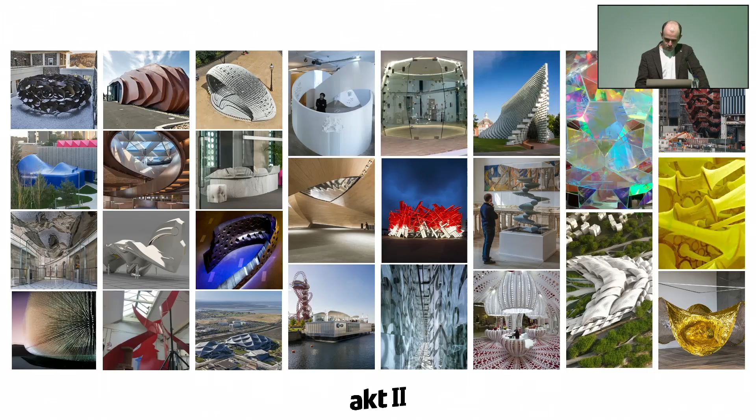I guess there's an invisible thread that connects emergency to technology, and incidentally it's a thread that connected the majority of the projects that I had the fortune to be involved in delivering for the past 18 years that I've been working in practice. I particularly enjoyed reviewing the students' work this morning, and I'm sure that if you were there, you'll be able to recognize some or many of the challenges encountered during the course in the projects I will be showing you tonight. Where do we start? I just wanted to talk a little bit about engineering for a change.

Engineers, we're trained to solve problems, and so we do like solving them, but the harder the problem becomes, the more satisfying it is for us to solve. And incidentally, this is not a good thing sometimes. And this is not me saying it, it's actually Bill Baker from SOM. We asked him to write some notes for one of our books. He was the principal engineer for the Burj Khalifa. And I thought his approach was quite interesting, almost like a therapeutic self-understanding of his own practice, our practice.

The postulate, this affirmation, is that just because we can engineer a solution, it doesn't mean that we must do it. And straight away you can perceive the gravitas, the responsibility that directly or indirectly is given to us when a project is starting. I think Bill's intuition needs some expanding. Our work is about balancing the many different forces that are driving projects and their interrelationships, which is what you guys are also looking into in the course.

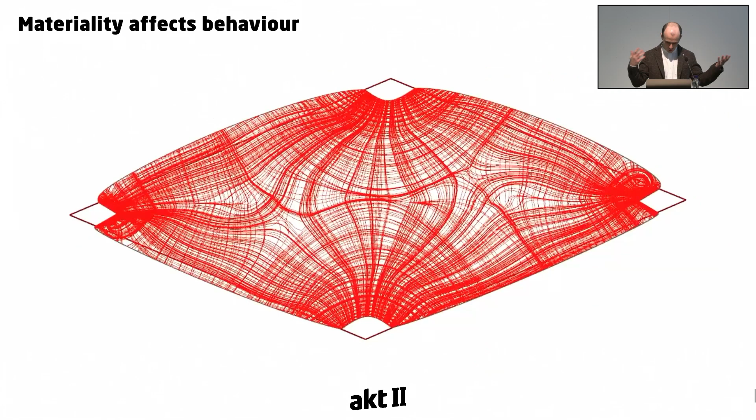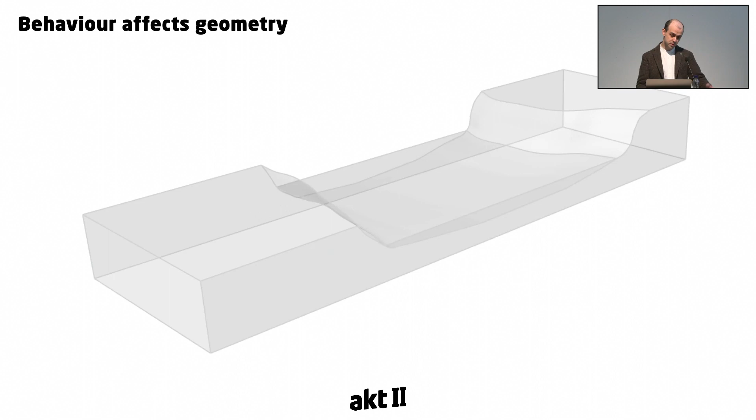So often materiality affects behavior. When we're trying to master that with the tools that we've got, we find interesting relationships, but conversely, behavior also affects materiality, so it's not a linear relationship. And whilst it affects materiality, it also affects geometry. So then the system starts to be more and more complex. And mastering that, especially in the early stages, can make or break a project.

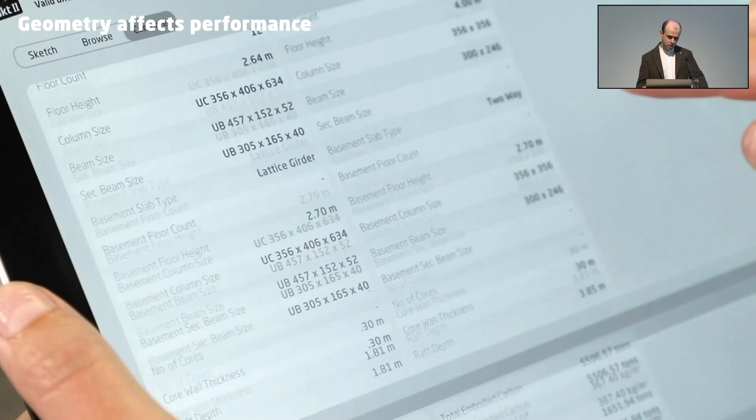But also, as we saw today, performance affects comfort as well, and this is an area where we're particularly interested. I don't know why it's skipping through, but the intangible impact of the external environment has a very big effect on what we are designing, and also on how the buildings that we make develop and expand into their design life. So our focus is always on the small, almost impossible target of integration of the various challenges we confront when we deliver a project, that very, very tiny bit in the middle.

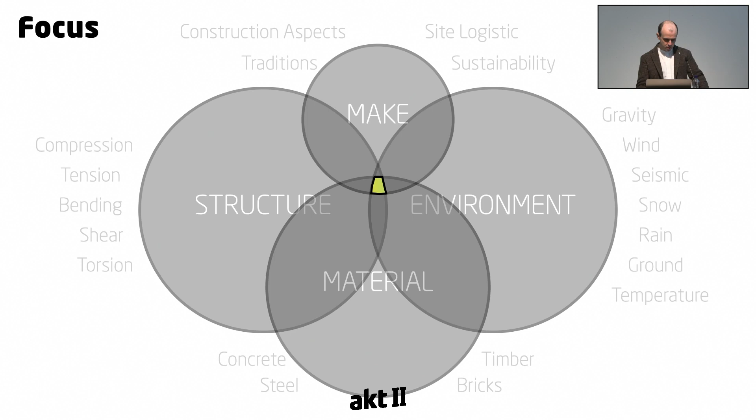But how do we get there? In our team, we have a very strict applied design and research approach. And for us, a lot of things start with process. One way of seeing it is going through the process of understanding and analysis, so going into the past, working through the historical data of a particular project, and then formulating the hypotheses and the solutions. But also the other process, the synthesis, the creation process.

So looking at the future and what that particular project will have to comply with in the future, and also predict some solutions there. But in the process of analysis, we look at traditions. So often there's a perception that some solutions are more appropriate than others. But in every project, we must look at and carefully balance the conventional solutions with the non-conventional ones. That's where research comes through.

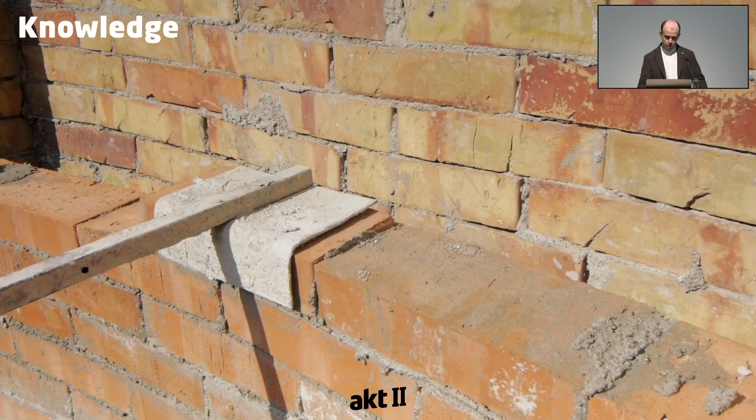And this is an important step to define the optimum outcome, whether it's when we look at the structural system or materiality, for example. And knowledge of a particular system is essential in highlighting methods of constructability, tolerances to work with, the expected movements, and also the environmental performance as a reference.

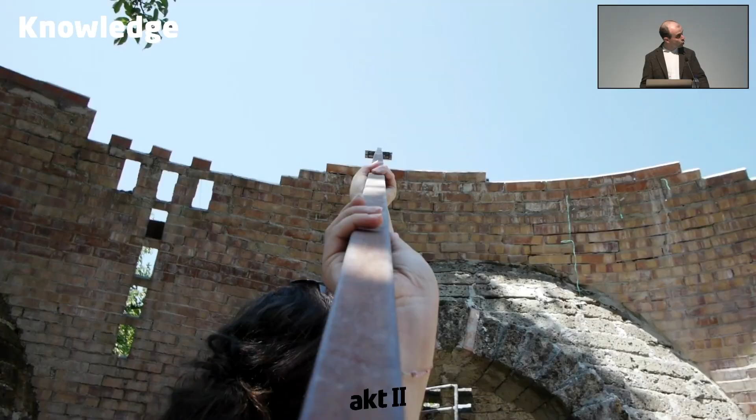So I think for us, when we start a project, it's always about looking at these parameters, but also looking at availability of a particular material or of a particular knowledge in the proximity of the site, because that drives sustainability and performance, but also drives cost. Location, of course, plays a big role in driving some of the choices. So this is a step that really needs to be taken into account from the very beginning, as this will impact our choices and how our interventions interface with the surroundings, but also how the installation methods are constrained, for example.

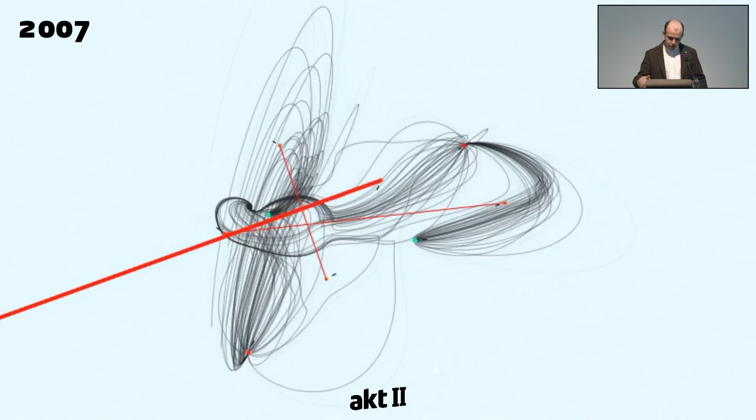And when I joined AKTII in 2007, our team was already at the forefront of digital design. Already back then, we were experimenting with in-house developed tools that play with generative design. This was a bridge over Farringdon Road, where we were playing with occupancy and usability of the crossing, defining the geometry of the structure itself. We progressed that exercise and kept refining our weapons in that sense.

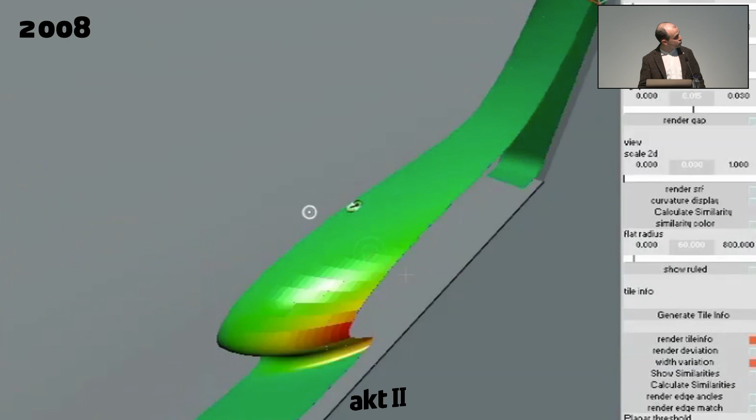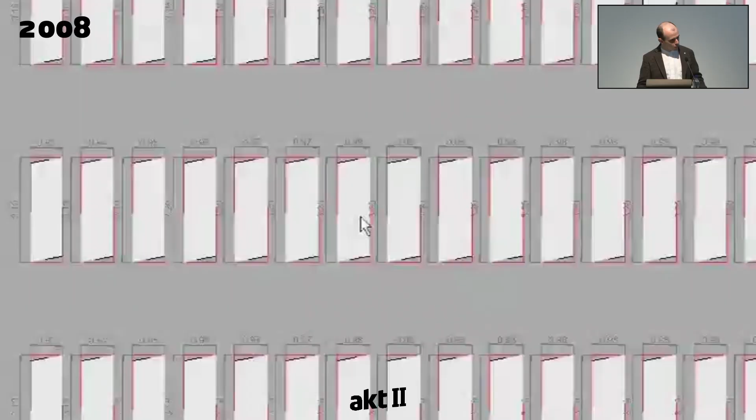This was again a software we did for delivering Zaha Hadid's Heydar Aliyev project, trying to rationalize the surface into the least amount of families of panels according to the fabricators' molding capabilities back then, which weren't as good as they are right now. And again, if you look at it with the eyes of today, this is sort of straightforward, but back then it was really trying to push the boundaries of how to control the process and how to manipulate geometry and structure to make something that is efficient.

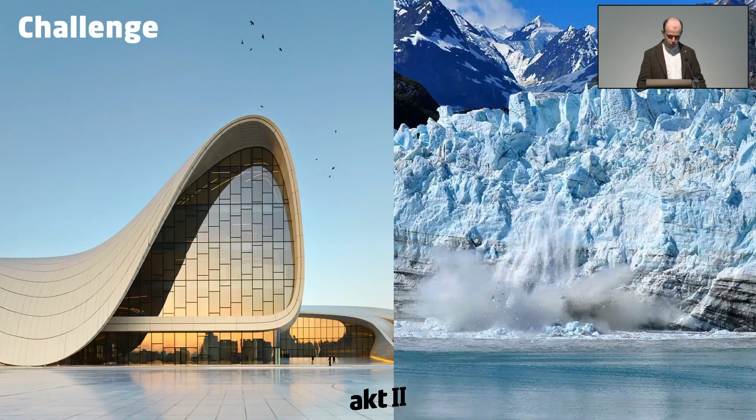And again, looking at the external environment and external boundaries for us has always been fundamental to understand what would be happening for our buildings, and how we could use that information, visualize it, and use it to design better buildings. But obviously now it's different, because the power of computation and possibility has exponentially increased, and it will do in the next 2 or 3 years or 2 or 3 months. So from one end, you've got total freedom and total speed of making things, but you're also starting to lose control. And I perceive that the challenge is not aesthetic or geometric any more, but is focused on consumption reduction. So I think that finally computation can come in handy.

So in putting together some examples tonight, I split the presentation in 4 parts, and I wanted to start with the methodology. And a project that was quite fundamental for us was back in 2016, where we had the opportunity of testing tolerance at very, very high risk, at hyper speed, and against all odds. And this was the Serpentine Pavilion with Bjarke Ingels in 2016.

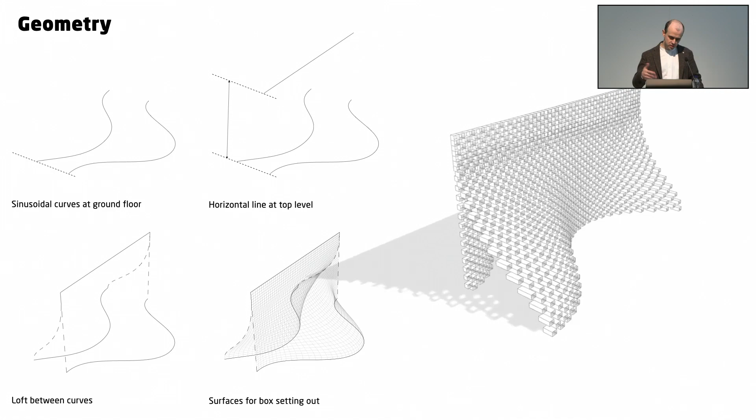Why high risk? High risk because the Serpentine is obviously, as you know, quite constrained. And Bjarke Ingels wanted to use a material that had never been used at this scale. The materialization of the pavilion was this idea of how a wall can become a pavilion if you unzip it. But when you have a new material, a new constraint and only 8 weeks of program, things can become quite tricky and almost impossible. So without a non-linear process that digitally connected the material to the geometry, to the performance, this project wouldn't have really happened. And at the time, the constraints of the competition were really, really tight.

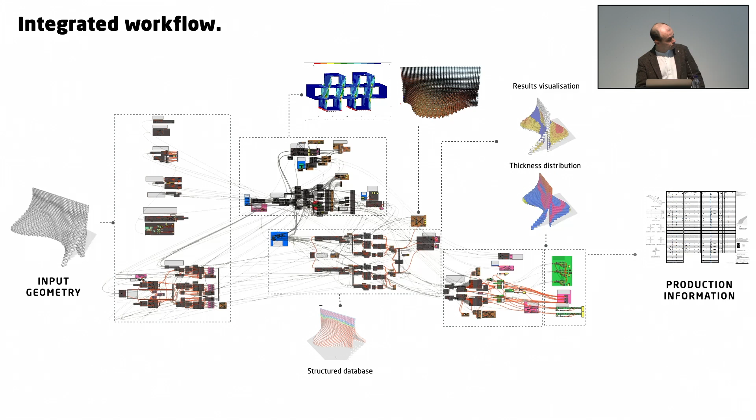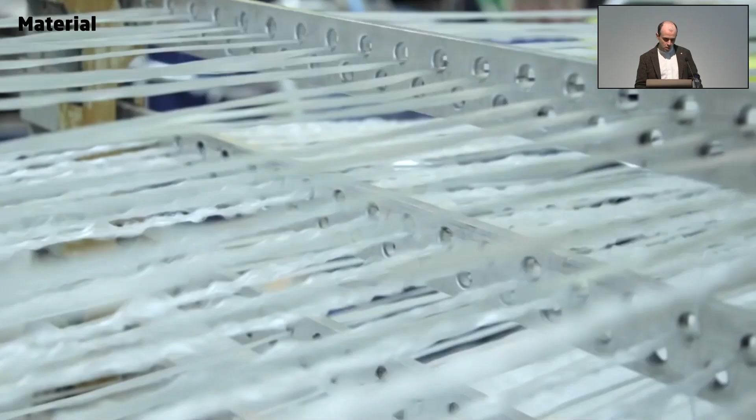The pavilion was made out of flat sheets of pultruded GFRP, which is a glass reinforced polymer, put together, glued together with the same material and interconnected by an aluminum connector. So the idea here was to control the materiality and the performance through the different distribution of the fibers in the different slices of the material. That gave us a first opportunity of controlling structure.

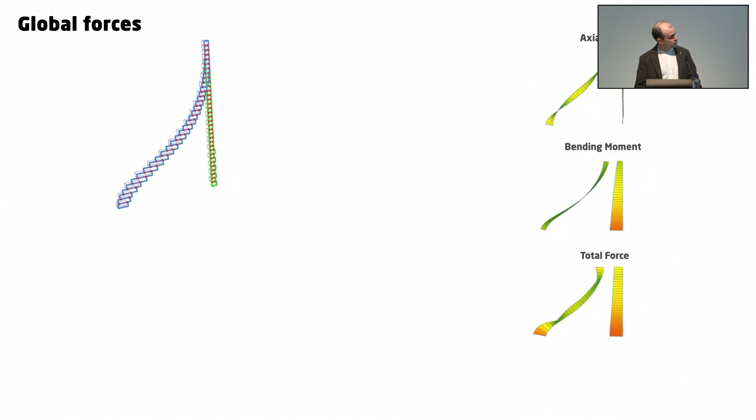And as I said, the material was bespoke as well for its properties of transparency, of translucency, actually. It was very, very important for the architects to create this evanescent result at the end. So the fibers were very carefully placed around the different elements, which meant that we needed to respond quite quickly to the different iterations, both in the macro scale, understanding how this wall performed against the external forces, but also how to quickly communicate back to the team where the critical points were in terms of connections.

So our methodology was to distribute on one end geometry and in the hidden layer understanding all those performance issues, but on the other end the output was the production element, so we could iterate quite quickly. And in doing that, we also started to highlight visually the features of the project to allow the architects to really visualize how the structure would perform aesthetically.

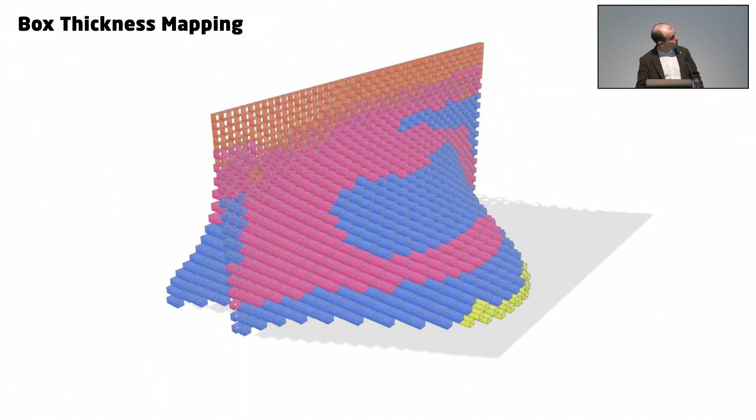And as an example, this is the box thickness mapping, which would allow them to understand the translucency in different areas. But for us, it was really interesting because obviously this material wasn't used before, and there's only so much you can simulate and digitally understand before some real-world data. So we had to do our bit and digitally model the structure, but at the same time, building control was asking us to prove our results.

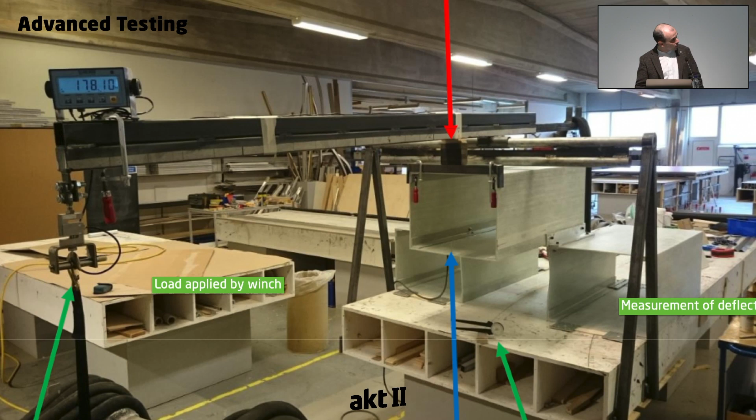So we had to partner with the university, make up a full-scale mock-up of a module, load it with the worst-case scenario, and then compare the result. And this particular exercise of comparing digital versus real was the actual exercise that convinced building control to sign off the structure. So as you can think, quite a critical moment in the 7th or 6th week. And again, high risk and super high speed, as I was saying before.

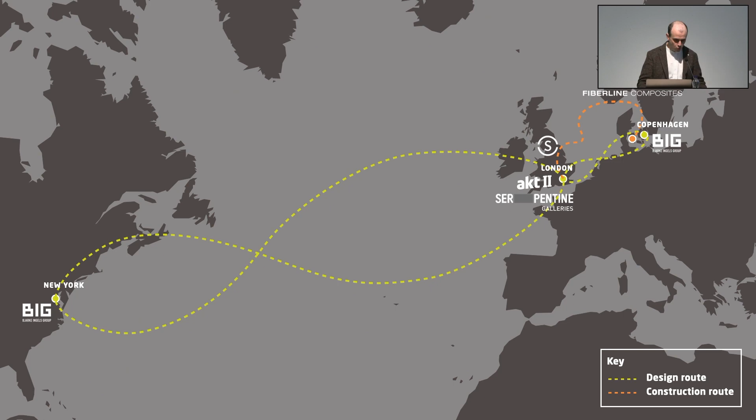But it was not only that, the challenge. The challenge was obviously that methodology is also connecting the different actors in the project. So learning different ways of describing the same thing, learning different ways of talking about the same thing. And also controlling the final outcome, not only the manufacturing, but also how the things were coming together, as this step was fundamental to hit the deadline and to make sure that the pavilion could open in time.

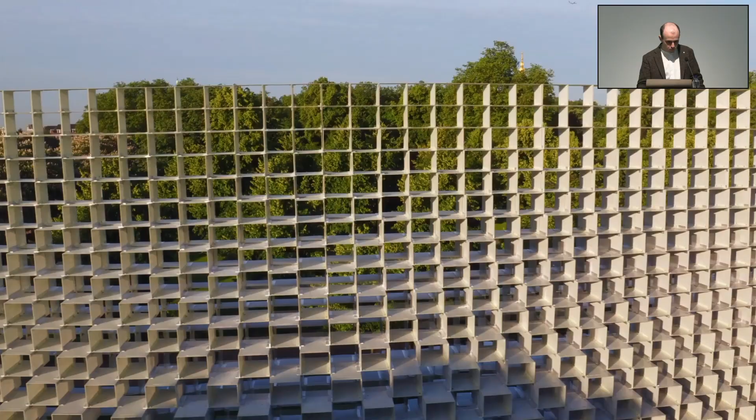So in the end, it worked out, but I think it was largely due to the thorough and rigorous way of setting up a methodology that didn't only work for us, but worked for the wider design team. This is a couple of shots, and I think from the video you can appreciate in some angles the translucency, which is quite beautiful.

So I think methodology is where I would start, and then moving on to alchemy. I think topology and shape are the intersection of architecture and engineering. So, as I said, the challenge has changed. It's not only about aesthetics anymore, it's also about challenges in climate, and this is what we are starting to perceive from our clients. There are stricter and stricter embodied carbon limits that we need to reach, and often those are almost translating into status quos, and material on its own cannot really carry an intrinsic value.

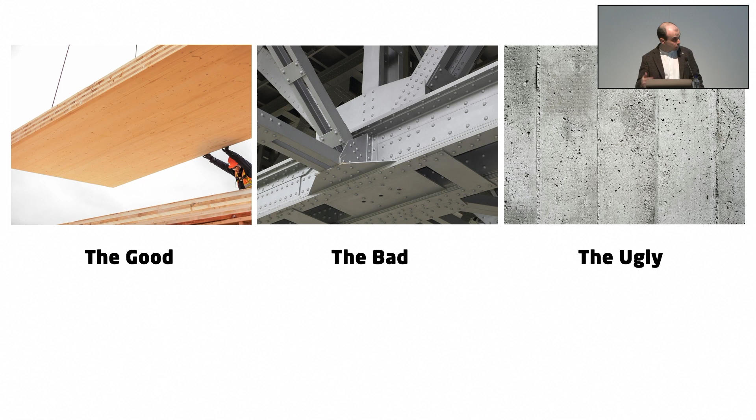Often we hear timber referred to as being good environmentally, but it's difficult to make that measure, especially when you are measuring the impact of a material against climate targets. Of course, if we're just pointing the finger based on what we've done so far, the contribution is clear. But also we have to be careful because we are just at the beginning of the journey of understanding things. So equally, all that glitters is not gold. So we try to give a bit of an example. As an industry, we are trying to learn the impact of the increasing demand, for example, for engineered timber.

So it's imperative that we use this resource wisely. As you can see, when we learn about forestry and how long it would take to grow a specific amount of engineered timber for a specific project, the scale starts to really put some question. So it really needs to be the right reason to use the right material, as opposed to just checking one choice. So I've tried to put a couple of examples here.

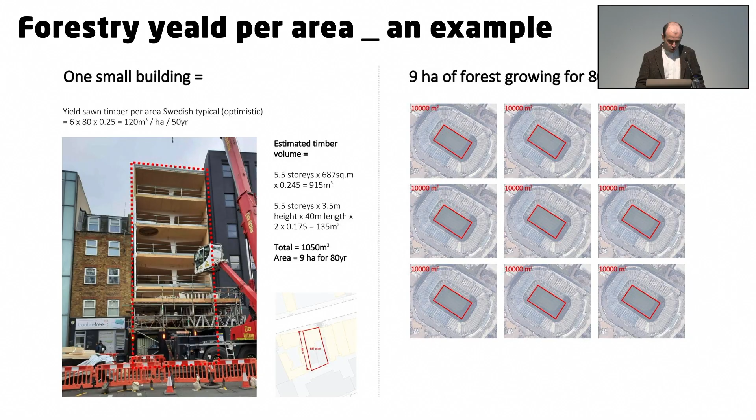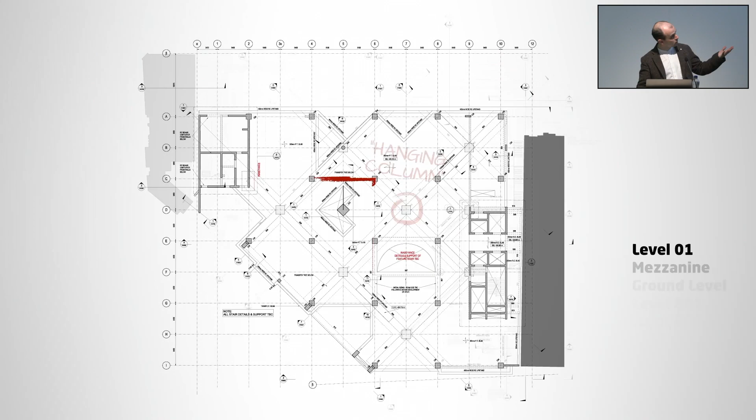What I found interesting about the scheme is that the brief from the client often drives the choices. In this case, the scheme was looking at providing a sports hall within the basement, a great hall throughout the ground level, and a variety of academic and study spaces at the top with multiple levels of offices. So you're starting from a very large space at the bottom and going to a very tiny room at the top, which is not what you would do logically, but this is what the project required.

So there were tons of engineering challenges here, from the delicate context outside to the tricky transfer due to the program requirements. So I think it's very important that we're looking at a solution where topology and shape really drive the solution and the efficiency.

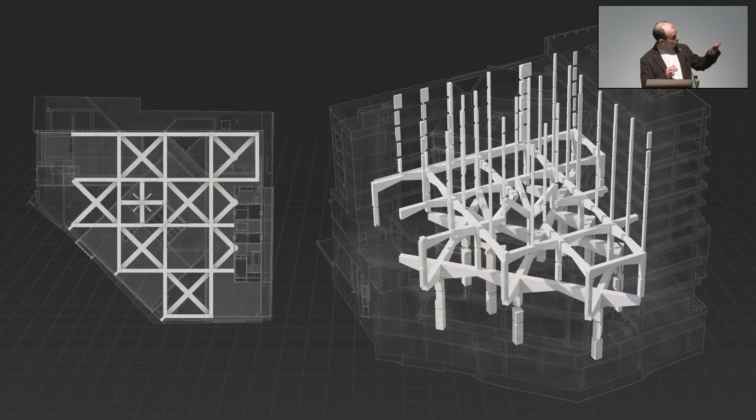The intuition here was to resolve the space distribution by utilizing a rotating grid, which had two twists of 45 degrees. This kind of operation posed a column spacing of 15.2 meters at the ground, then 10.8 meters in the study spaces, and back to 7.6 meters for the office spaces at the top.

So with this kind of first principle intuition, we resolved all the transfers of the structure, avoiding structural gymnastics, avoiding spending material where it was not needed. We really used topology to drive the shape, resulting in an efficient engineering solution.

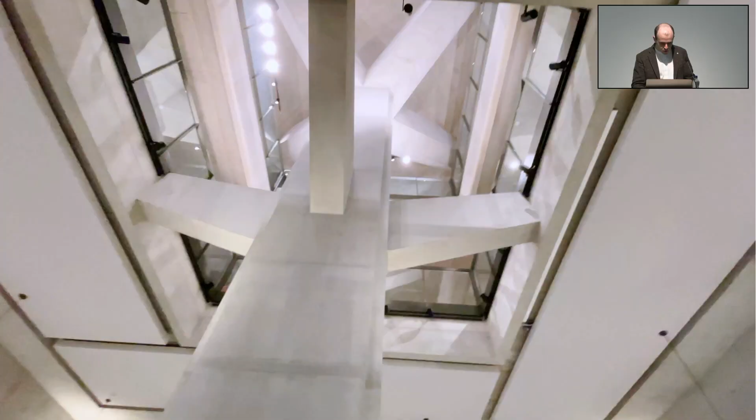And then, incidentally, the concrete also became exposed, revealing these beautiful perspectives around the building with the trees that now define the building's architectural identity. For me, this was a really interesting example of how, by driving the geometry and the shape, you can find efficiencies.

The second project I thought carried interesting lessons is the Google campus in California. We worked at the very early stages with BIG and Heatherwick Studio to develop first the master plan for the client, and then some of the buildings.

Here the ambition was to create a Buckminster Fuller type of envelope, and to free up the internal buildings from the facade requirements. So the goal was to develop an office that could be truly adaptable and would not have to stick to the constraints of the facade internally. This was actually BIG and Heatherwick's first collaboration.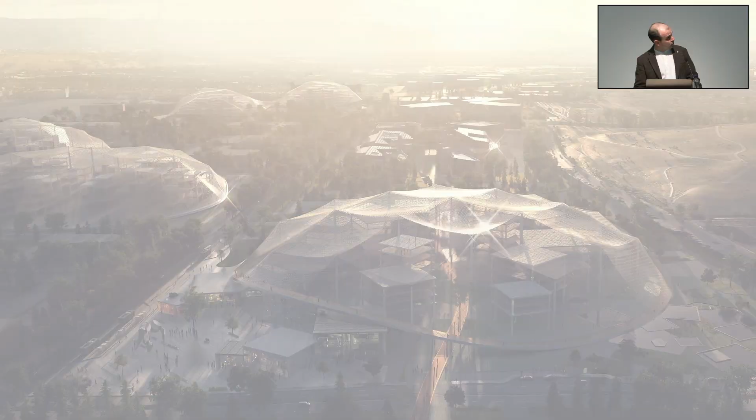So the challenge structurally was to find a lighter, simpler, more flexible and adaptable system that would comply with the high seismic and wind forces of the bay. In the early stages of the concept, we looked together with the architects to create a form-active structure, investigating the efficiency of creating stiffness through curvature.

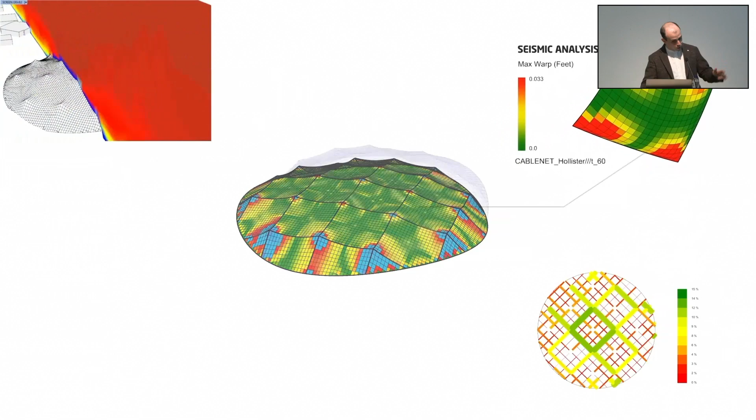That kind of form finding allowed us to introduce cable nets, which are lightweight tensile structures that rely on high pre-stress forces at the perimeter to generate stiffness. So on one end, we could create a reduction in material expenditure, but without affecting the reliability of the structure.

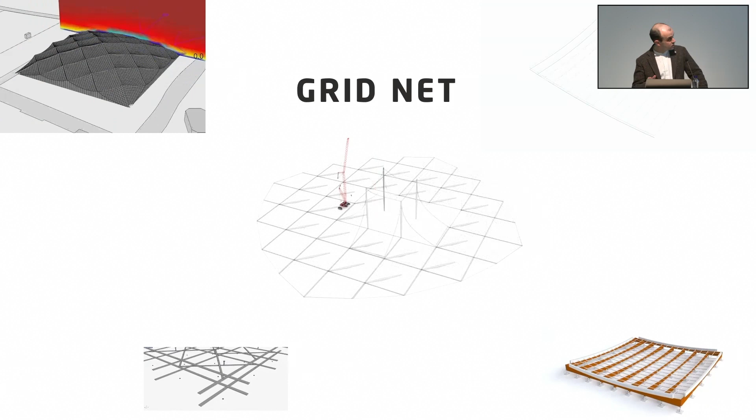Moving forward, we also developed the design looking at a hybrid system, which eventually became the final solution - a combination between a traditional grid shell and a cable net. This is quite lightweight and economic because it's singly curved, so it's simple and quick to fabricate, constructed by layering steel bars into rigid networks.

I think this project for me was quite revealing in the sense that covering such a large span would not have been quite straightforward, but also in a way we've utilized the structure for many other reasons.

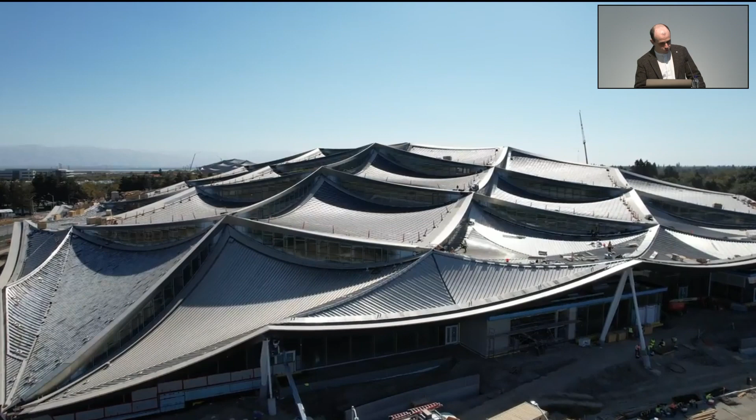The canopies in this sense are covered in solar panels, which supply 40% of each building's energy. They also collect water into storage tanks down in the basement, which makes the building water net positive. In California this is a big thing, as the region is always suffering from long periods of drought. So again, topology and shape are being manipulated to create architecture and engineering which is performative.

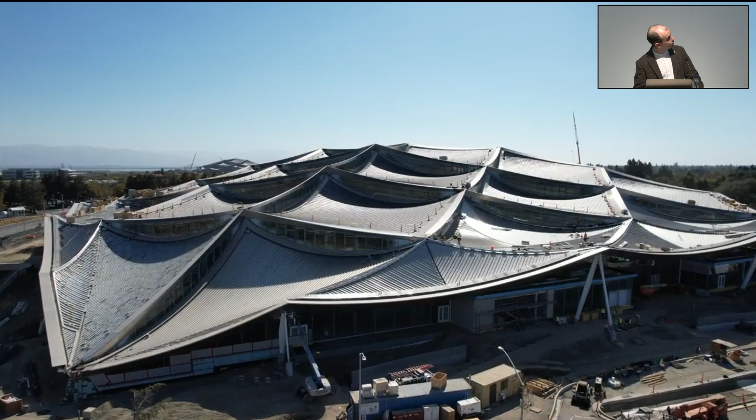And then the last example in terms of alchemy, I would say, is the Red Sea development. In this case, with Foster + Partners, we looked at developing the entrance to the resort. I think I found this project interesting because the condition in which we were operating, the location, had a lot of different challenges.

The site ecology was driving the whole design, trying to minimize the contamination of the water. We weren't allowed to use concrete, or had to minimize the use of concrete as much as possible. We were also looking at regional resources and availability of timber there. Obviously the local climate had a massive impact, and the intention of the architecture was to create this barefoot experience.

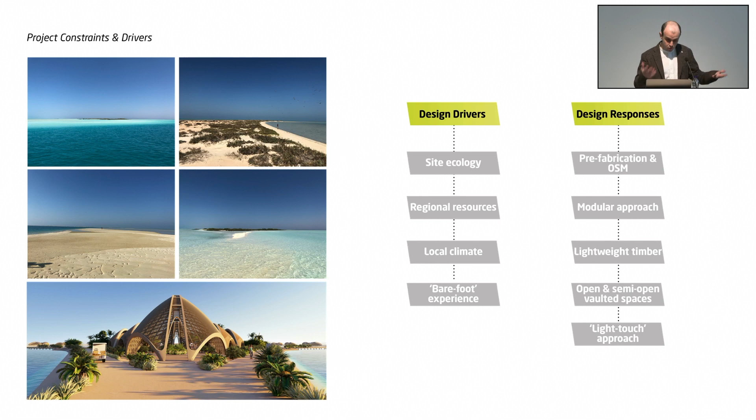So for us, again, the response was also looking at prefabrication. A modular approach to deliver the pieces down was a challenge on its own. In this sense, choosing timber made an awful lot of sense, and choosing a topology that allowed us to manipulate the surface to create lightweight grid nets again made much more sense.

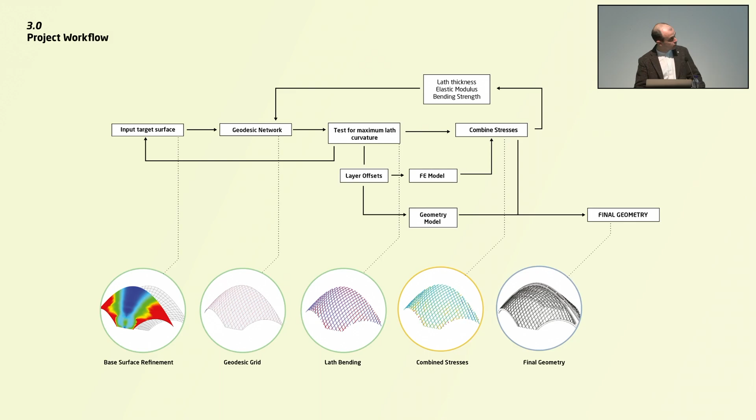So we developed the schemes following a similar methodology that I showed you earlier in the pavilion, but with a higher degree of understanding of the timber behavior, to further rationalize and minimize the amount of material.

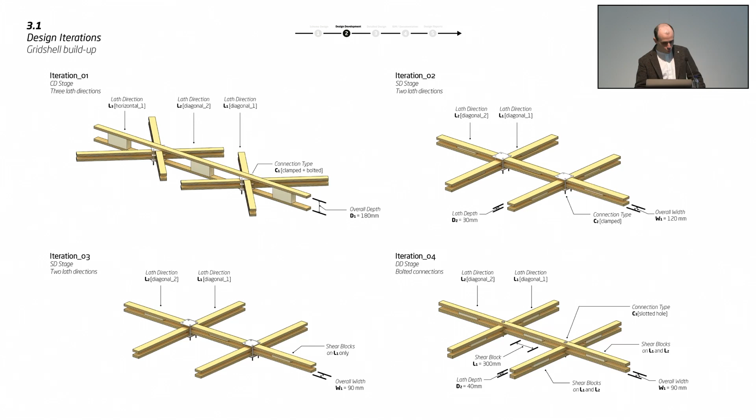Timber is quite interesting as a material because it's pretty much an elastic behavior, so there's a direct relationship between the curvature and the stresses. You can't bend the material more than it can take, as it would break abruptly, different from concrete and steel. So in this case, we've really been playing with these relationships and also playing with the detailing of these relationships to create the final shape from the initial architectural intuition.

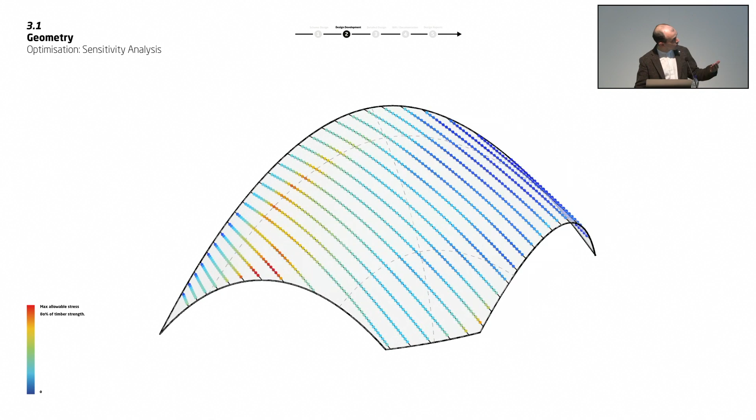And again, tools allow us to do that quite quickly nowadays. But it's not about the process of form finding most of the time - it's about how the verification of the final result can take place. And again, this allowed us to really explore more relationships, create different typologies of structure, and the system really allows us to plot out and go into fabrication a lot quicker than it used to be.

But again, the project is on site at the moment, and it was quite interesting to see it growing quite quickly through the process.

I think the challenge that we have doesn't get resolved only by manipulating topology and structure, doesn't get resolved just by optimizing. It does need an extra look. And I think in the series of projects I'm about to show you, it's kind of the contextualization of the challenges about how we make sure that we're adapting some building stock to extend the life and to capture carbon. That's the final bit of the recipe that I think we all should start to really question and look at when we start a project.

And I'm going to start with 100 Liverpool Street, just down the road. This is a project with Hopkins Architects. Here, the brief from the client, British Land, was quite simple - just take two tired 1980s buildings and transform them into the gateway to the new Broadgate campus.

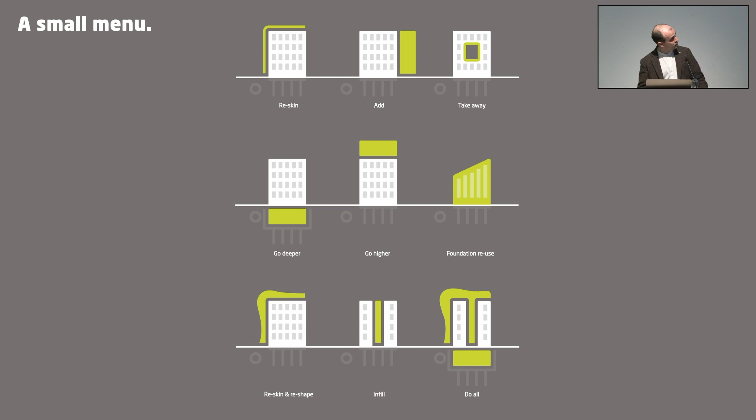And in this particular project, I think we hit them all. We reclad, we added a portion of the building, we took away other portions, we went down adding some basement, we went higher adding some stories, we reused all of the foundation, and we infilled. So again, it was very interesting how the project developed.

So this is kind of where we started. The challenge was to extend 40% of the additional floor area without strengthening the foundation. And how would we be able to do that? So it started with the real challenge here, which was really understanding what was on site by poring over thousands of drawings and archive images.

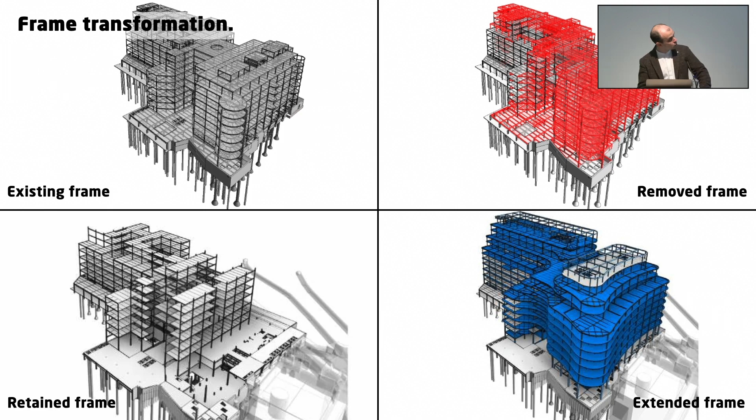It was literally a forensic engineering approach that helped us determine the potential of the structure. Then through computation and analysis, we justified the intuition. We took the existing frame, removed what we couldn't retain, kept as much as possible including all the foundation, and then extended the frame only where needed. But that meant we needed important approaches to understand how to maintain and extend the existing frame, keeping the existing loading paths and strengthening only the columns that required it. Without the tools we have now, this would be a very complicated exercise.

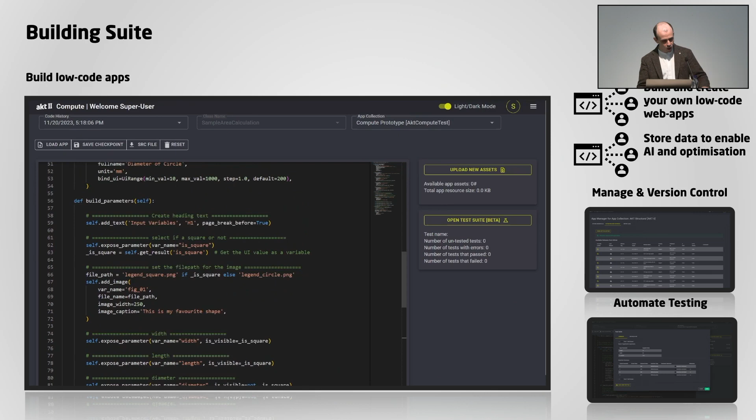This methodology will be even more powerful when the data of the building is accessible digitally in the form of building assets. For this reason, we started to develop compute in-house that will allow us to drive this agenda, storing all the digital information about a project, so in 20 or 30 years' time, when we have to reoperate on it, it will be a lot easier. We won't have to do that forensic exercise we had to do for this project.

I think overall, this building—incidentally British Land's first net zero building—has been a monumental effort from the whole design team. But it also really is a first test case that showed the potential of keeping the building stock as much as possible, using computation to enhance that.

Another example that looked instead at going higher is the South Bank Tower. In the original developer-led competition, we teamed up with CIT, the client, and KPF to look at this site. We won on the basis that we were the only team proposing to retain the existing tower rather than demolishing it. I think this shows the perseverance and confidence we needed to have at that point.

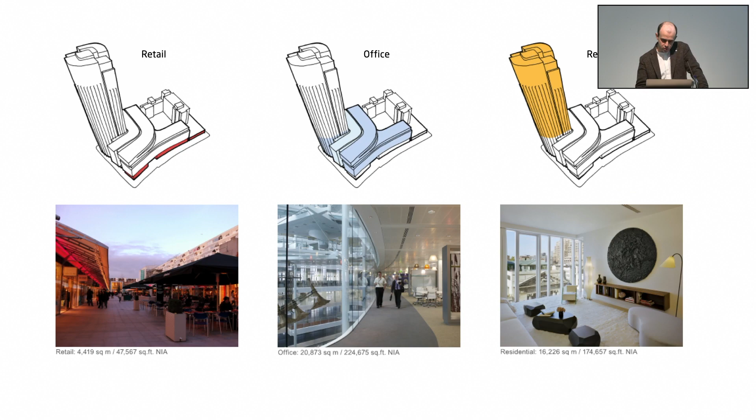At the time, we confidently suggested extending the tower by 4 stories. But the more we understood of the existing scheme, the more confident we became, and in the end we extended it by 11 stories. Partly this was because of the proposed use—we were converting from an existing office building into residential, which meant that comparing existing versus proposed loadings and changing the final usage, we were able to assess a lot of spare capacity in the frame.

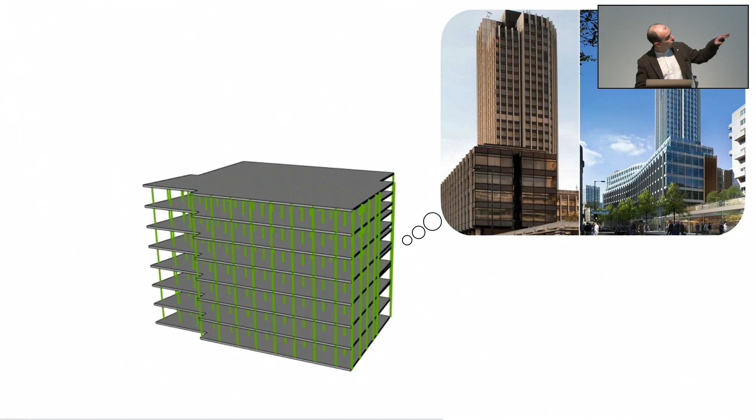When reusing an existing structure, it's important to have a good understanding of its resilience and the impact additional loads have on it, to limit and reduce the use of new materials and keep the carbon balance. A lot of the exercise was assessing spare capacity and then playing with different materials and materialities until we reached the original capacity of the columns. The ambition was not to modify or strengthen any of the existing structure.

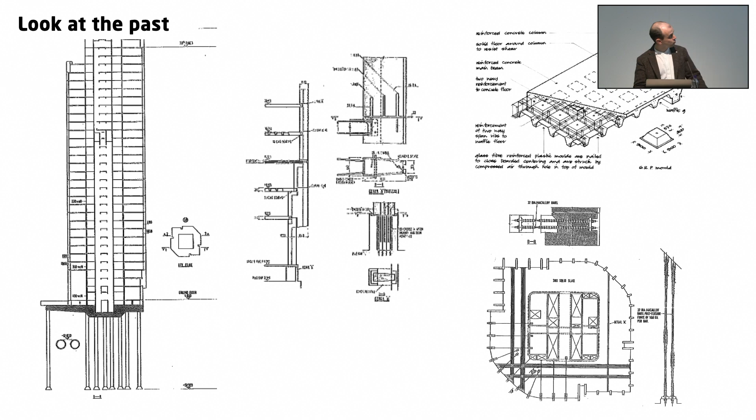So it was really a process of looking at the past, at the existing information—which was quite scarce—but also looking at the future. In this project, I think we were able to use, for one of the first times, computational fluid dynamics to understand the actual wind loadings on the tower. This was a key step in demonstrating that the original design was very conservative. With this analysis, we were able to reduce the wind loadings by 40%.

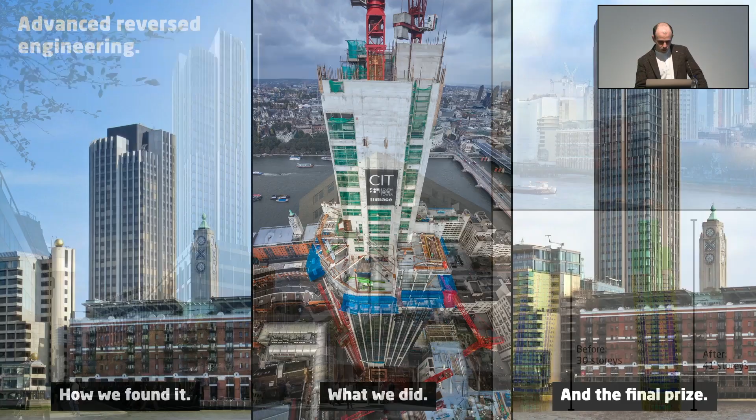That meant the existing tower, and particularly the core, had plenty of spare capacity, and we used this argument to extend it by an additional 11 stories. The existing core was extended, and a cantilever was sprung out from the supporting level to pick up the stability of the last section. It's a monumental example showing how we need to rely a lot more on the existing building stock and on our capabilities to create new spaces.

In reflecting on these things, I think research has a very important role in bringing all those lessons down to the paper. We've been quite firm throughout the 25 years in looking at research as a method, as a means.

The projects I'm about to show, I think, are about materializing intuition through research, often with little to no budget. We see a lot of examples in academia especially that look into important steps in research, but when we're practicing, research is often very difficult to fund. I think we've been quite good at picking and choosing projects that really explore different methodologies and different materialities, pushing the boundaries of material.

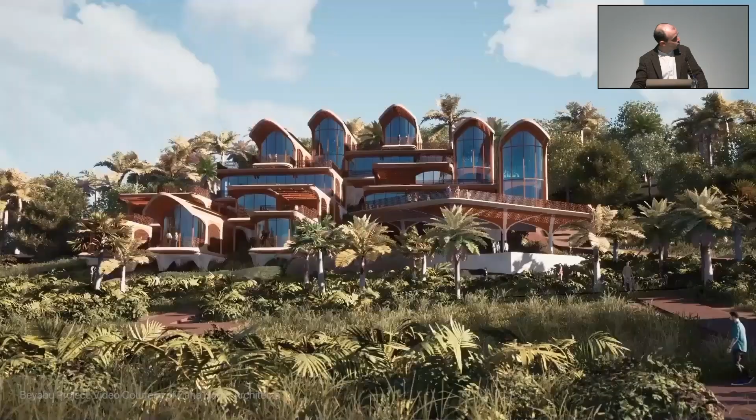One of the projects I really enjoyed the most is this with Zaha Hadid Architects in Roatan. The reason is because it had a holistic approach on how to create a new modular system through the specification of the architecture with a component-based design, with a platform that allows the clients to start from their occupancy levels, so a box defining where they wanted to be on site, and then delve down deep with the configurator into the interior design. So it was a completely controlled approach.

For us, that meant that in the background of the system, we had to define a structural approach that matched all the different potential configurations, and we had to play it back into the platform to allow those choices to materialize. That was the first step, defining a method that works with the choices of the client. The second constraint was to define a typology that would work, creating this kit of parts that could be reconfigured around the different choices of the client, allowing the different permutations of the structures to choose from a catalog of structural systems and apply it to the configurator to make sure the choices of the client were, in fact, possible in the end.

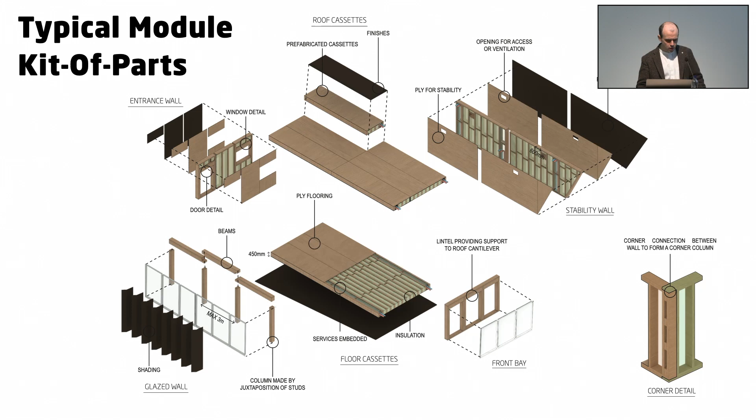But zooming out, I think the most interesting part of this project was to really relook and rethink about local timber supply chain. So we went down there and identified two main producers from local certified forests in mainland Honduras. We looked at how they processed raw materials, and we created a proposal for a new factory that would take that material, process it, and by using digital construction, would create these modules with a lot more tolerance and a lot more control.

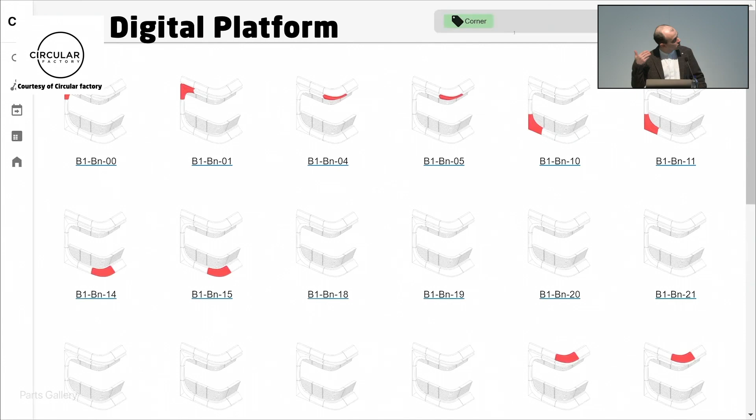So the project went through, and it's currently on site, and the Circular Factory took over the definition of the system. I found it interesting that that approach translated into a platform that can now control the fabrication of the pieces and how they come together, which means we have a lot more control on waste, a lot more control on timeline and execution of the project. Through digital control, we can schedule every single component of the system and understand the implications for timeline, cost, and manufacture. I think it was an extremely interesting opportunity to look at the full scale process from design to creation to manufacturing and to installation.

And again, it's a way of actually looking at the potential of the tools that we can now implement.

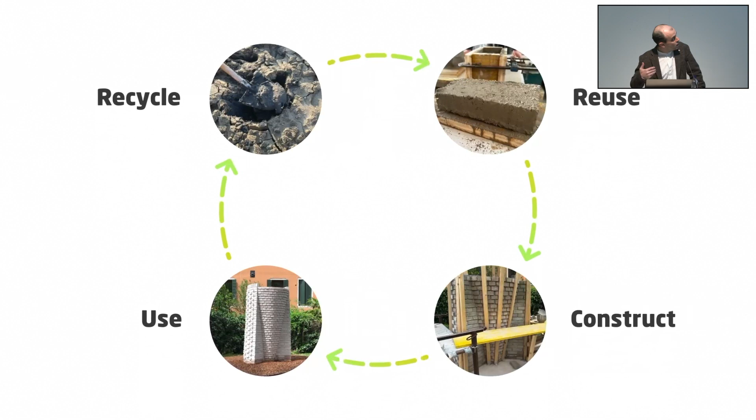The second project I'm showing in terms of research is a project we just did in Venice. I'm making a big jump from tools to materiality, so this is a pure material research project. We don't do that often - I think the previous one we did was the Serpentine Pavilion. But it's been a very interesting collaboration with Urban Radicals, as we wanted to define a methodology of looking at a potential reuse of waste material, creating a new building component material using waste, using it, and potentially then reusing it in a future application.

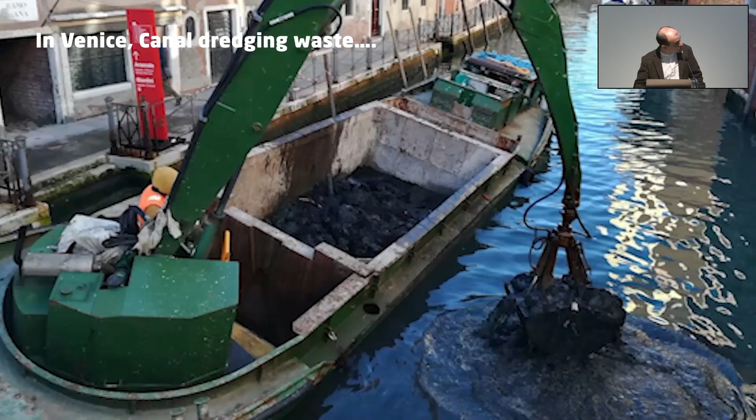The premise was this: in Venice, canal dredging waste gets collected every six months with small boats, and it gets deposited onto an artificial island outside the main city called Tresse. This is an interesting thing - a completely untapped material. It's highly toxic when it gets collected, but it gets purified, or cleaned up, before they deposit it. So the idea is, what if we use this to make a new brick for Venice?

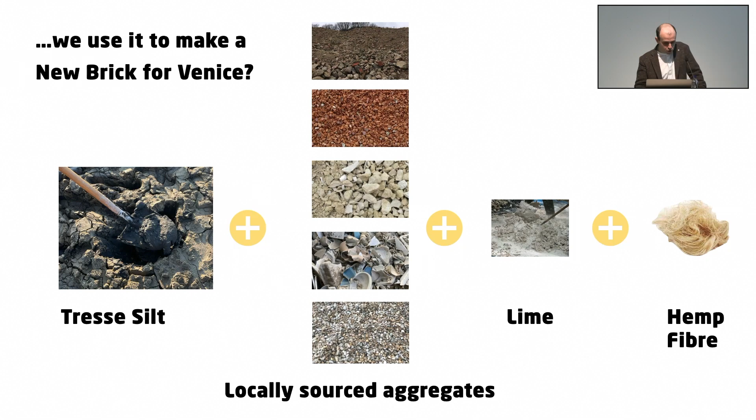The whole research we initiated was to define more the methodology rather than the output. We had to make it into something in the end, so the whole architecture was inspired by Venetian heritage, and it was designed with the location in mind. We've installed it in the Giardini.

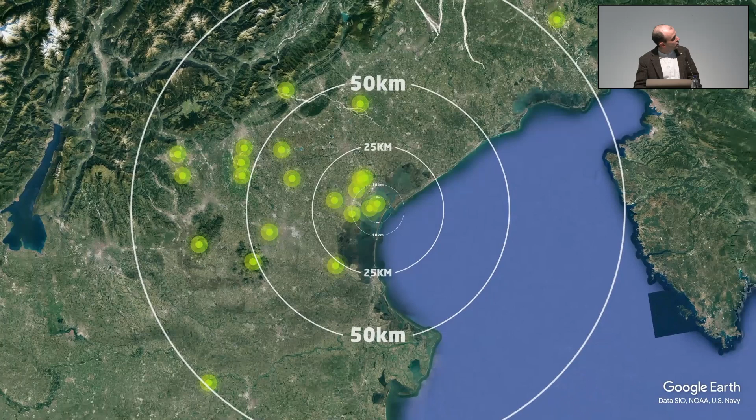But the whole idea of having the interdisciplinary team of architects, engineers, and manufacturer was really to define the process. And in the process, the first step was to identify the containers of all the different ingredients for the brick, and trying to define this radius to where to source the material as close as possible to the site. So we did do the exercise.

We identified all the places where to collect crushed concrete, crushed brick and mortar, the stone from the pavement of Venice. There's quite a lot of waste that goes into that, which is perfect to be part of the component of the brick. Glass and ceramics from Murano was also looked into, as there's a lot of waste from the chandelier manufacturing there. But most importantly, how to use the main component material, the waste mud.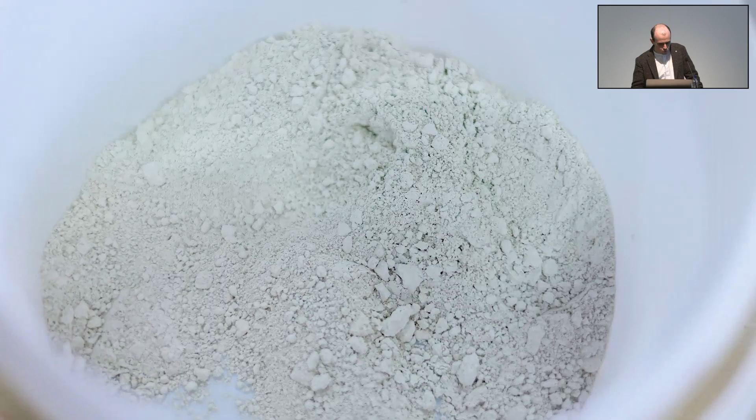So we did embark on the exercise. We went down on the island. We had to get special permission from the Italian Ministry of Transport to extract this mud, apparently. And they thought we were crazy, but we tested the process over here, mixing up different aggregates and different kinds of mixtures, including using natural tensile fibers such as hemp or sheep mantle to create some tensile properties. And then we tested the process.

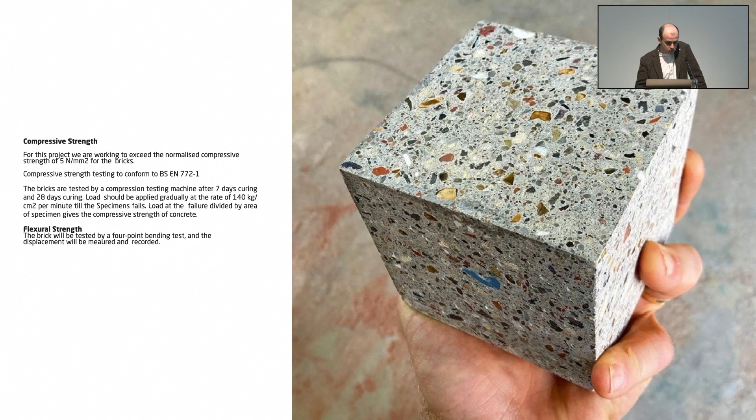So we specified very strict results in terms of compressive and tensile strength requirements. We did the testing over in the UK and in Venice to make sure that the final bricks were compliant with the regulations. And these are completely unfired, so it's a super low carbon approach. Those are some of the test equipment and the test specimens that we used to perform the tests, which were returning quite a high concentration of stresses and strength.

Because of the availability of the material, we had to split the number of bricks, so we couldn't use all of the lime. We had to make a regular lime brick without the mud, but half of the installation was made with the Tresse silt.

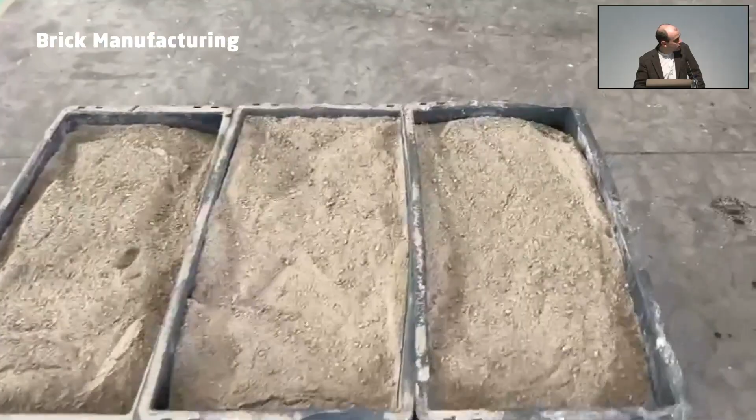And of course, we used computational methods to drive the geometry. And we collaborated with a highly skilled manufacturer down in Venice to put all the ingredients together, following our recipe, which was the most difficult part, just to make sure that they were sticking to the concentrations of different aggregates and to test the quality of the system. So the process was highly controlled. The brick is only pressed, so by carefully manipulating the strength of the pressure, we made it possible to create strong bricks.

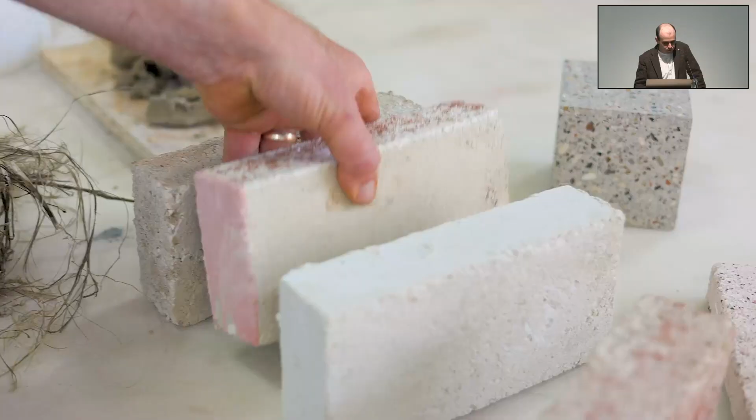This is one of the initial samples made down in Venice. So the whole process was quite a challenge, as again, time here was of the essence. We didn't really have much time. Here is where we installed the pavilion, and this is a little bit of a process on site to follow our geometric patterning to show the actual different manipulations of the installation.

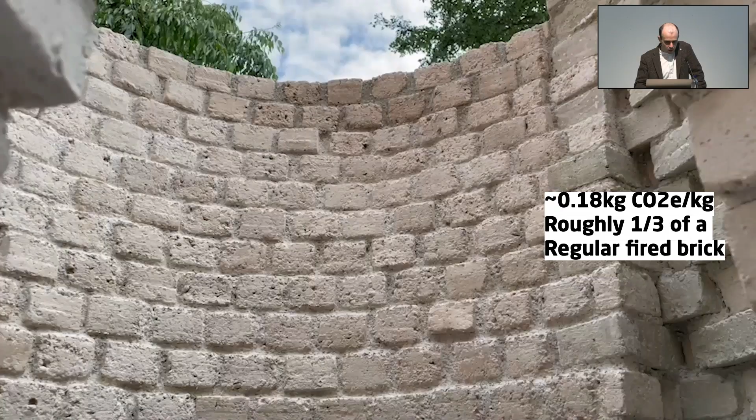So I think it was really interesting, and we ended up actually reusing a previous pavilion, the 2021 Cyprus pavilion, to make also some internal furniture, and the pavilion became almost like an open air library where people could come in, leave a book and read a book. And in the whole exercise, we managed to make a very interesting material, with roughly a third of the embodied carbon content of a regular fired brick. And it was so successful that the Design Museum actually asked us to give some samples to be part of the How to Build a Low Carbon Home exhibition.

So I think, for me, this almost summarizes all the challenges that I've been showing in the previous projects: how to control shape and geometry, how to control materiality, and how to make it in a way that we can also reuse the building stock or waste in our environment. But there's one last thing.

I did talk about external environment and how that can make a big impact on what we do as designers. And I think this project is really interesting for me because it summarizes how we cannot really look at a building in isolation and really need to understand the intangible effects that building is applied to. And planners and regulators are making a big effort in forcing us to do that. But intuitions often are creating interesting results.

So this project was an attempt at creating a waterless garden in the desert for the Sharjah Triennale. And we really tested our capabilities and understanding of our tools on how to perceive and control the geometry of those gardens to make sure that we could create vegetation without water, just by manipulating the local microclimate of the system. So really, it was about designing with data.

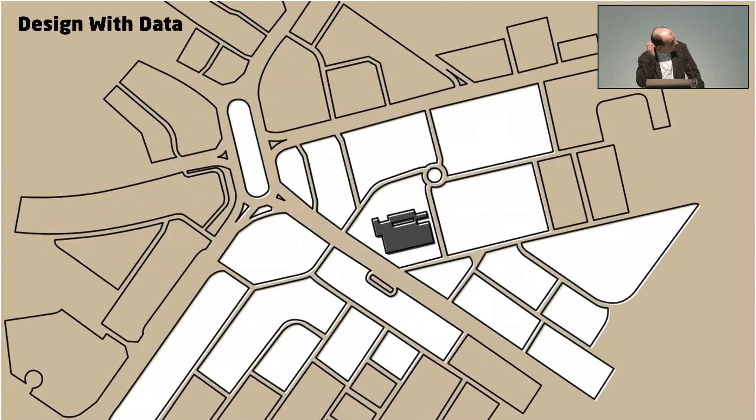And this project, we were lucky enough to be selected to be part of a 3-year program of research where we made the thing and we had 3 years of time to test and assess the data to test the validity. So the idea was really to pick up from where in Lanzarote they left off, this idea of confronting the adverse climatic condition and creating vineyards where it was really not possible. In Lanzarote, the inhabitants of this volcanic area have created this ingenious wine growing system where they made it possible to overcome the lack of rainfall in 300 years.

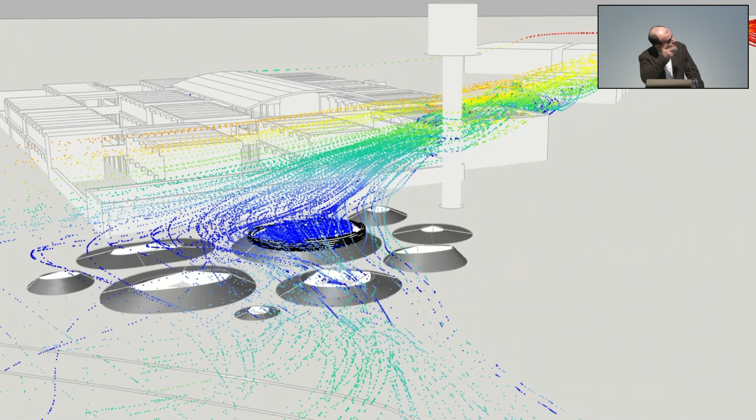So the vineyards grow in funnels, which are surrounded by little walls that are protecting the vines from the very high temperature winds. And also the funnel overnight creates condensation that also enhances the microclimate. So this is what we actually used as an inspiration. And we used, again, our tools to be able to define the depth and the diameter of those larger funnels to grow vegetation.

So we did several tests, and we looked at, obviously, the overall cumulative results. And we went and built the thing. And we also installed sensors. I think we installed control point sensors on the roof to understand the variation, and then we installed 3 sensors across the different gardens.

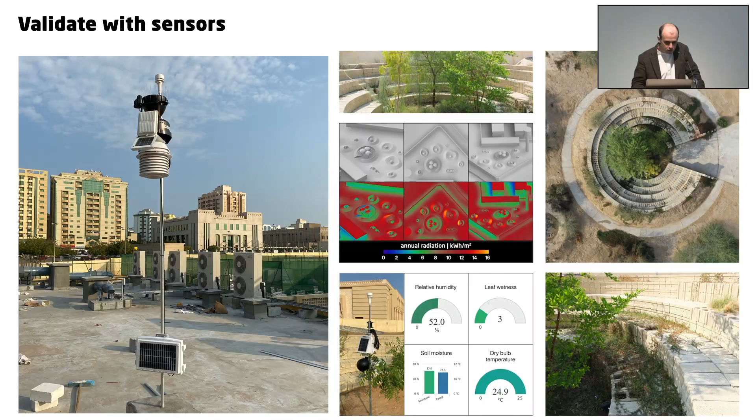This allowed us to live visualize the real data on the spot for visitors to explain what we were trying to do. But also now that we are at the end of the exercise, it allowed us to really relook at all the data that we managed to extract from the sensors, which span from temperature, soil moisture, solar energy, leaf wetness, the humidity at the ground level, and really start to understand the kind of output that we've been able to put together.

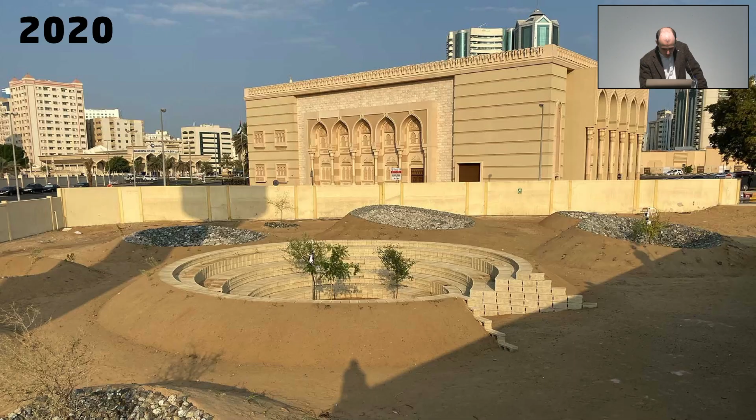And I think it has been quite successful because we really started to understand the overlaps between the different properties. And as you can see, the vegetation kept constantly growing without the addition of water, as those pictures are showing. This is when we installed the first plants. This is a year after, in 2021, where you start to see the vegetation growing.

And the interesting bit was that Cooking Sections selected the shapes, the typologies of vegetation present in the wider region to provide a menu in the bar of the school. So the vegetation would also grow some fruits and would all be edible. And this created the menu in the bar, which was quite nice. And this is the final result. So for me it was really interesting to see that kind of opportunity in real life and how we can extend that into larger developments.

And then I'd like to conclude tonight with a video that we produced for, again, the Venice Biennale in 2021. This was for an installation made by Daniel Lopez and Jesse Reiser and Nanako Umemoto, which was meant to give messages about architecture. And there were a series of videos reflecting on the climate challenge. There was Kazuyo Sejima, Timothy Morton, and it was quite nice to be included in that and being able to say our version. So we put this video together by reading some data available on the internet, and I'm just going to let it play, and I hope you like it.

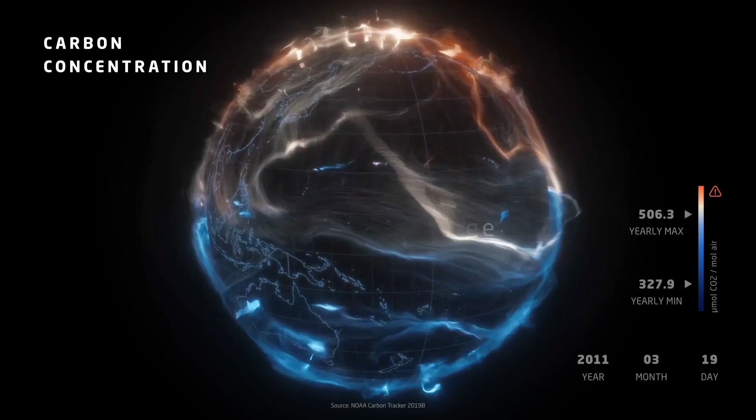As the human race is determined to reduce emissions, to prevent the catastrophic effects of climate change, this is not a process that can be entered into blindly. Wind speeds are constantly changing and increasing. Earth works under the laws of equilibrium. And different forces are affecting each other within the globe container.

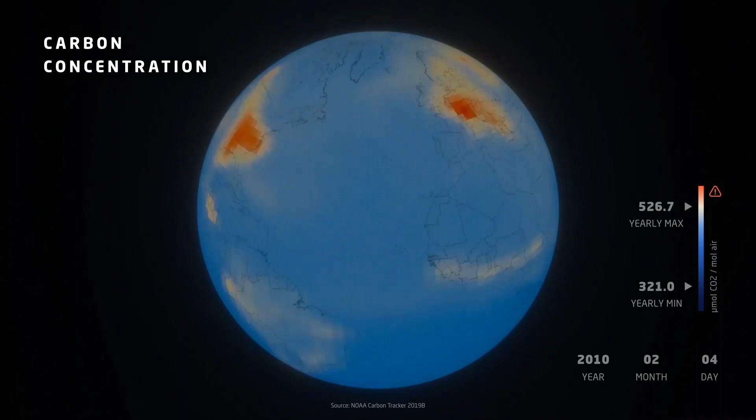We can now visualize those interactions, to help reflect on the causes and potential mitigations. At AKTII, we have visualized NOAA satellite data captured over a 20-year period to look into the pattern of CO2 emissions around our globe. In the search of equilibrium, we need a paradigm shift.

Yeah, so I think that was really interesting for me, zooming out and being able to manipulate and use the data that is available, that satellite information, really gives you the perception that what we're trying to do here doesn't quite make a massive change if we're not looking at the right scale. But it's important that through research, academia and collaboration, we keep pushing the boundaries and we keep researching into methods that allow us to deliver better buildings.